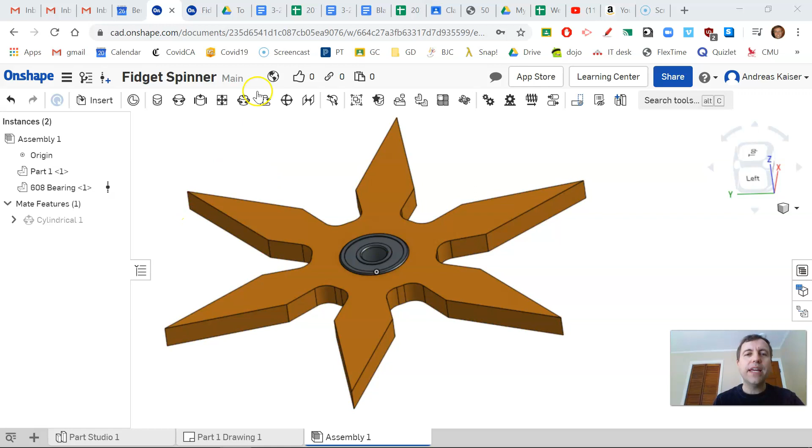This is our model. I found this online, it looked really cool. It reminded me of a ninja star, and I always wanted to be a ninja, so now I can make my own ninja fidget spinner.

I'm going to change a few of the dimensions. This 28 millimeter hole, I'm going to change to 22 millimeters to fit a 608 standard bearing that fidget spinners use. But the rest of the dimensions I'll pretty much keep.

Let's get started. I'll open up a brand new OnShape right here. The key to making any 3D model is deciding how you're going to break it down into pieces.

So going back to my design, I think I'm going to make this center circle first with the hole. Then I'm going to make one of the little spiky things that stick out, and copy it around to make the rest. I might add some other features later to make it look a little better.

Let's do this circular one. It's a 40 millimeter diameter circle with a 22 millimeter hole for the bearing to fit inside. I'm going to do a sketch.

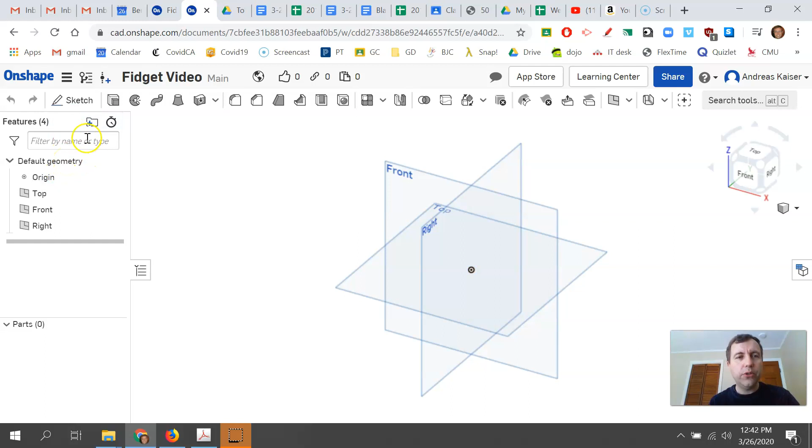Before I do a sketch, always check your units. I changed my default units using the OnShape preferences, but you should always check your workspace units. Make sure you're in millimeters, and 0.1 is good enough for accuracy.

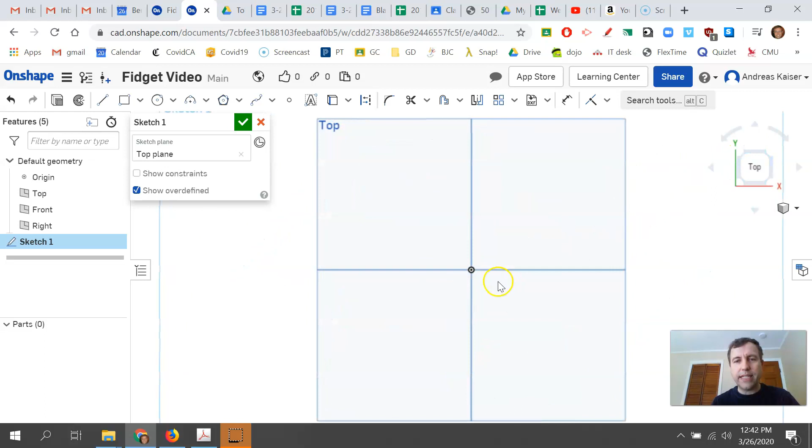I'm going to create my sketch on the top plane, click top plane so I'm looking straight down on it, and zoom in a little bit. I like to always show constraints, so I clicked on show constraints. I'm going to pick the circle tool.

In the sketch tools, make a circle that's about 40, and then make another circle that's about 22. That one wasn't centered, but don't worry, I can fix that later.

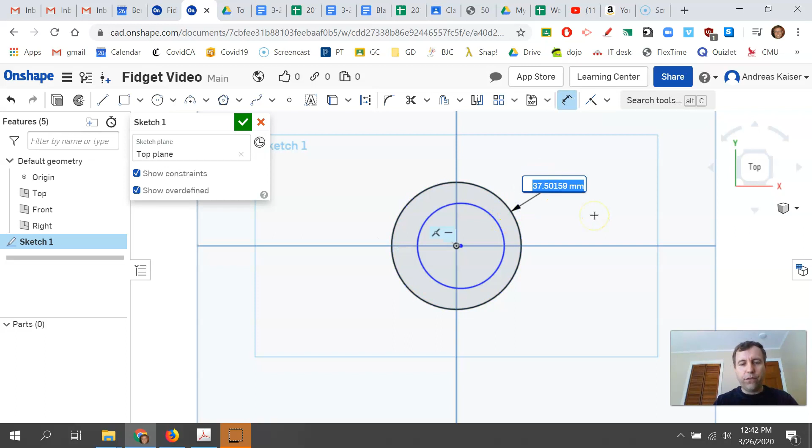Now that I got those two circles, let's dimension it. I can dimension this one to be 40 millimeters, and use the dimension tool to dimension the other one to be 22 millimeters.

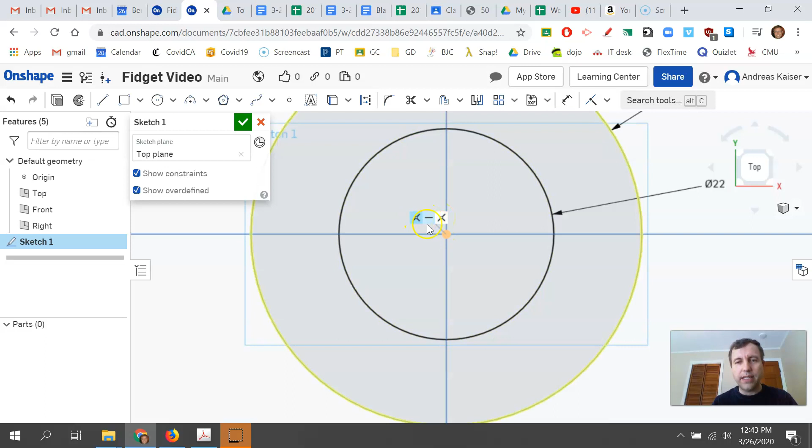This one's still blue because it didn't see that I wanted to center it. That's not a problem, hit escape, and I can move this blue one so it locks to the origin. Now this shows me it's constrained on the origin. Now they're both black, and black is beautiful. That's how we like it.

It's grayed out, that means it's a continuous contour. And we can do the extrude.

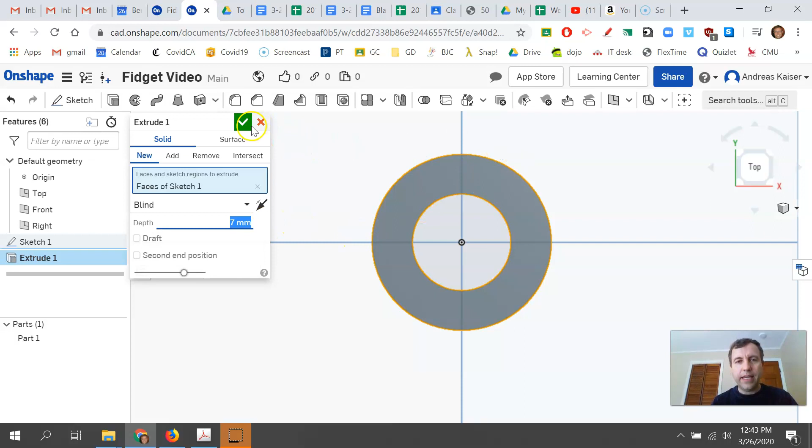Now I'm going to make my fidget spinner a depth of 7, because that's about the size of my 608 bearings that are going to be used. So I'll do 7 millimeters and check, and I can look at it in 3D, and that looks good.

Now that I got my center part, I'm going to make one of these little edges here, these little spikes. So I'm going to do another sketch.

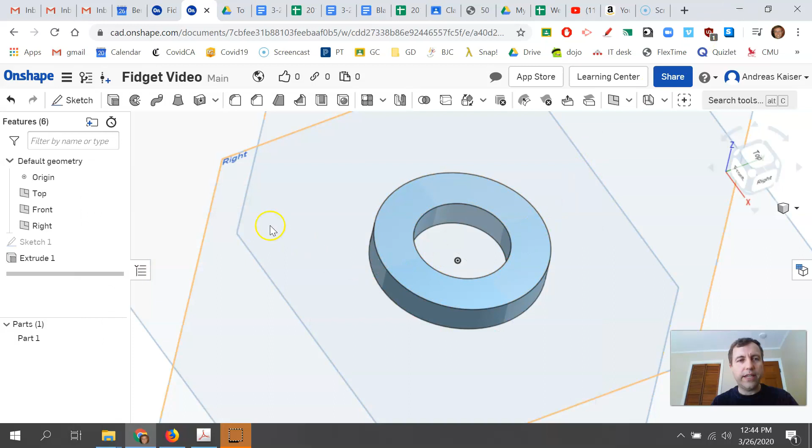Let's go and create our new sketch. I'm going to look at the top again, select the top, and create a new sketch on the top plane. I'm going to draw it right here.

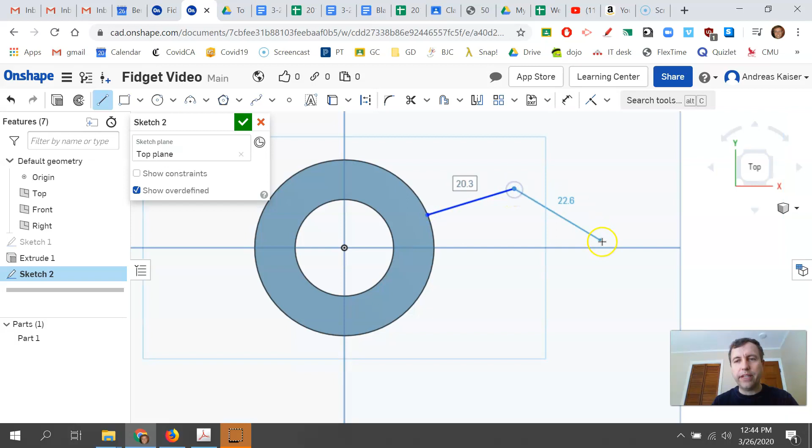What I like to do is freehand it first, just to see if I get the general shape. So I'm going to freehand one side of this spike. It goes somewhere on this circle, goes up a little bit, and then goes down to somewhere like that. Hit escape to end my line command.

And so it's going to look something like that, but obviously it's blue. It's not constrained yet. We have to tell it a few things, put some measurements in.

One of the things I noticed on the measurement is how far away this point is from the center. Looking at our measurements, we have this outside circle on our 2D drawing, which is a diameter of 146. Half of that is 73. So it looks like from this point to the center of my fidget spinner is 73. Oh, it's right here, they told it to us down here too. So 73 is that distance.

Now I can go and do my dimensions. I'm going to go from this point to the center and change it to be 73. Okay, so got the end point there.

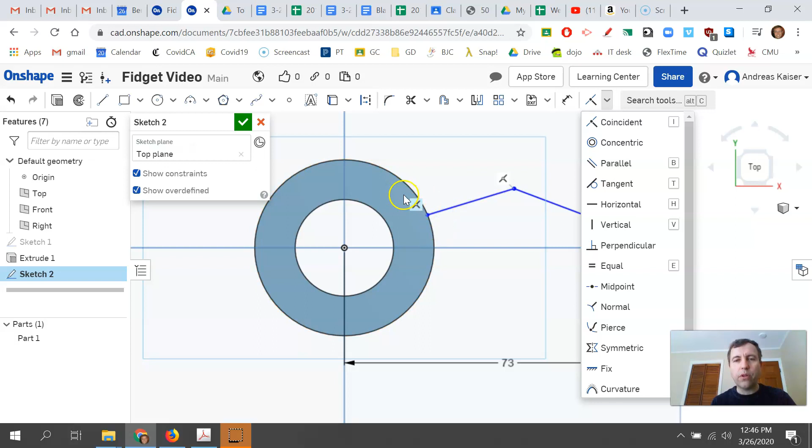Now another thing I noticed is this line is supposed to attach radially to that point. There's not a constraint for that directly. I was looking for a collinear, and I didn't see a collinear I could use. But what I did see is normal, so I can use that. Normal is kind of like perpendicular, but for a circle. So if this line is going from the radius, it must be attached to the circle at a normal, or 90-degree, angle. So I'm going to use normal and say I want this line and this circle to be normal to each other, and lock that one down.

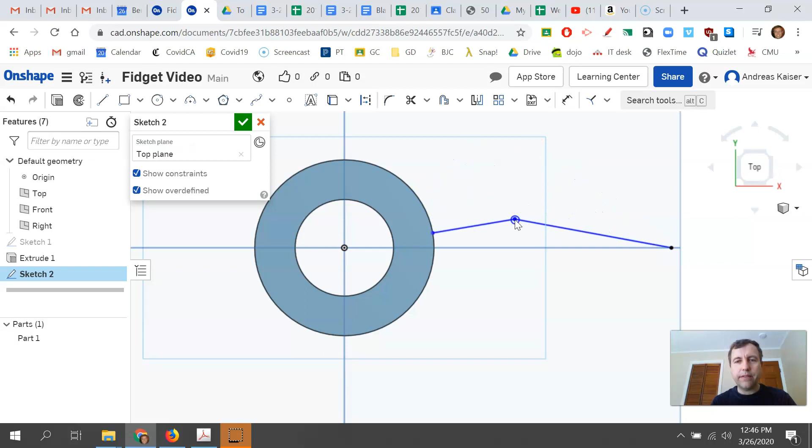Now it's still not black for a couple reasons. One, this angle - it doesn't know where this point is. How angled is this? Is it barely an angle, or is it a steeper angle? Let's see if we can find the angle.

Going here, I notice there's 15, it's a 15-degree angle from this edge to the horizontal. So we can use our dimension tool. I'll select this line first and then that line, and it lets me do an angle. I'm going to say that should be exactly 15.

Good, now it's still not black. Remember, when it's blue, it's not fully constrained. We boo for blue - boo, boo, boo for blue.

All right, so now we're going to try and see if we can get this blue to be black. I'm going to try to grab the blue, or this point, and see what the problem is. It knows this line, but it doesn't know where to transition from this angle to this angle. So let's see if the drawing shows us.

Well, it looks like the drawing says that there's this circle that goes around here that's a radius of 36. So that means from this point to the center is 36. So we can add that dimension.

Let's try to do that. We're going to go from dimension, from this point to that point, and make sure it's a radial dimension like that, not up and down like this. We have to do angled like that, and type in 36.

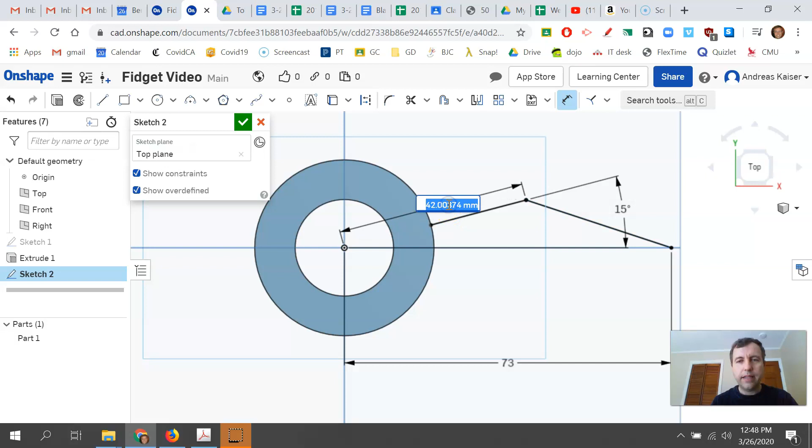And now we have it fully constrained, but it's only half of our spike, so we need to add the next half of the spike, the bottom half.

So in order to do that, I'm going to use the mirror tool up here in my sketch tools. When I select the mirror, it says first select a mirror line. I want to mirror around this line, then select entities to be mirrored - I want to mirror that line and that line. And since I mirrored it, they're fully constrained because it's using these constraints, just copy them over again.

And that looks good. Now, this is not a complete contour yet. If I try to finish this sketch and do an extrude, it's not going to let me select this spike because it's open here - we didn't close it. So Fusion automatically closes it, but OnShape does not.

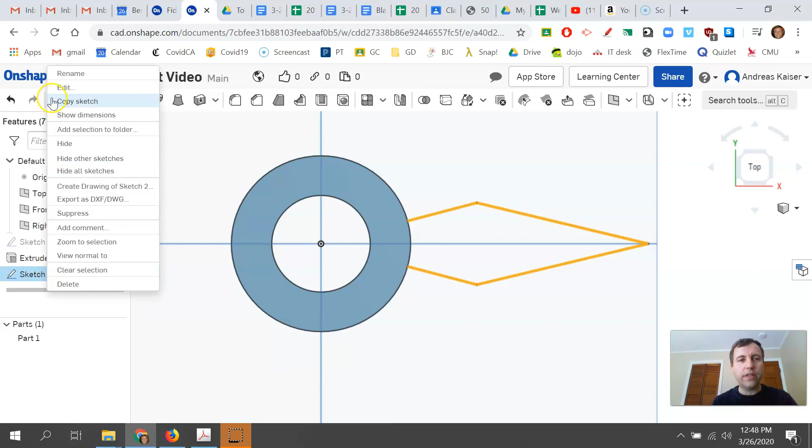So I'm going to exit this extrude and go back to my sketch. I'm going to right click over the sketch to go back into sketch mode. Now I'm editing the sketch, so I have to add this little curved line.

So I can use another feature that both OnShape and Fusion have. It is to convert entities into sketches. So this is not part of my sketch, this circle - it's from the extrusion that we did earlier.

I can select a tool up here which lets us project or convert. So we're going to project and convert this circle. Now it added this circle to my sketch. It's still black, hard to see, but it is added. But it's the whole circle, and I don't want the whole circle—I just want this little snippet right here.

So I'll use the scissor tool to trim. I don't want to trim this part, I want to keep that part. I want to trim this outside part. So I'll trim that, and now it's grayed out, telling us this is a complete enclosed shape that I can extrude.

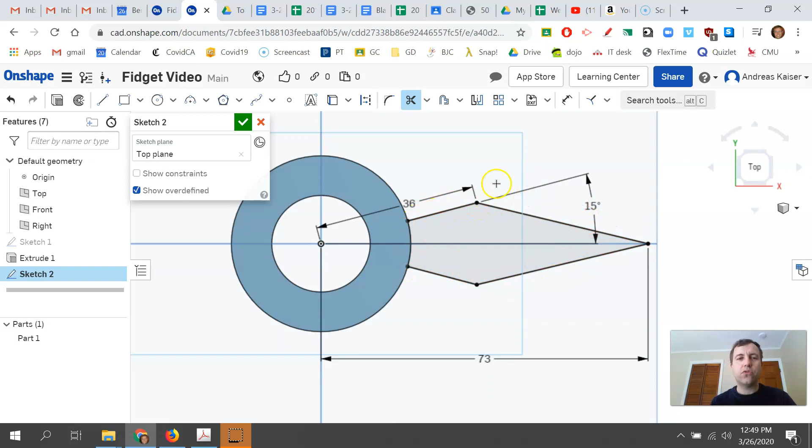So I can say I'm done with that sketch, and now I can extrude. What do I want to extrude? Which face? Well, I want to extrude sketch 2, so I'll select sketch 2, and then do it in 3D. How far do I want to extrude it? I could type in 7 again, and that would give you exactly the same height as the earlier extrusion.

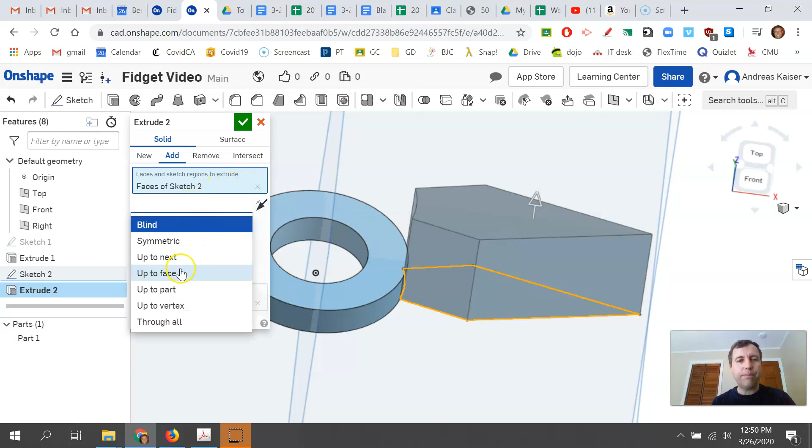But let me show you some other tricks you can do. You can go up to a face, so now I can select, hey, go up to this. That way if I change this to be more than 7 later, this will automatically change. So that's always good to do, link things like that to make it easier to change everything at once if you decide 7 is too thick or too thin later on. This looks good, I'm going to select done.

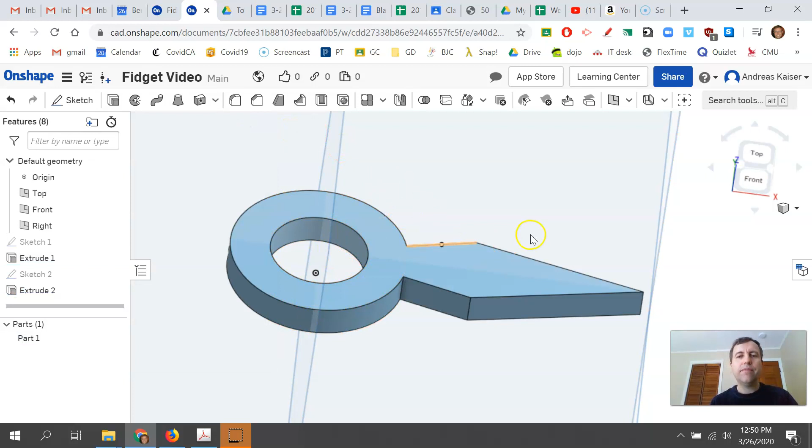So I have my first little spiky part of my fidget spinner. Now I want to add a bunch more. If I look back at the drawing, it looks like I have 1, 2, 3, 4, 5, 6 equally spaced around this circle. One way to think of it is like if you spin them around this axis that's coming straight out of the center of the fidget spinner.

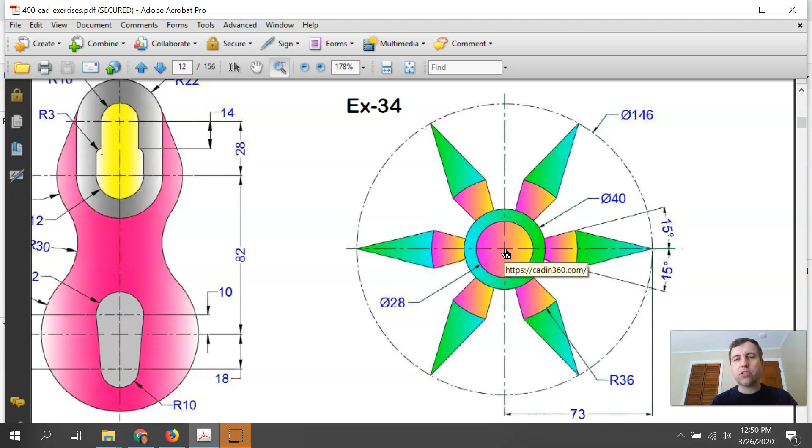So Fusion will automatically have axes where the 3 planes show up, probably somewhere in this menu. But if Fusion doesn't, or OnShape doesn't for sure, you can add your own axes. So we're going to do that next.

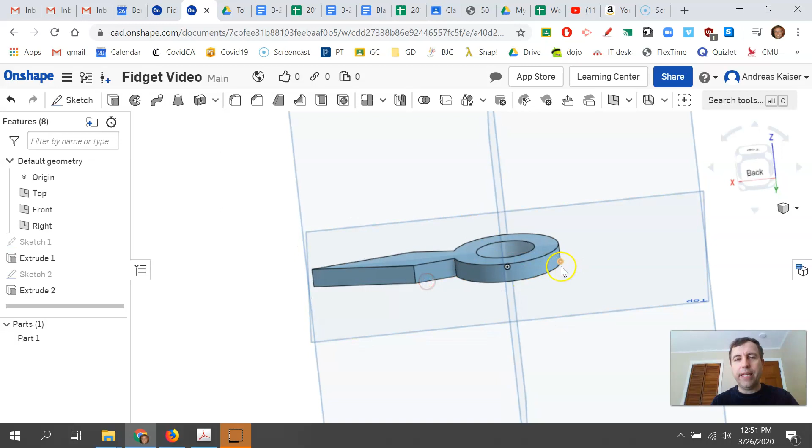So I'm going to pick maybe the front plane. I'm going to go to the front. If you right click on the front plane and go view normal to, it'll flip it around so you can see it from the front. And I'm going to create a new sketch.

For this sketch, I'm just going to draw a straight line up from that origin, straight up. I'm going to do what's called a construction line. Now that's highlighted, which means I'm drawing construction lines. I'll click a line, click here once, and then you see how it's like a dash line with big dashes and little dashes? That's called a construction line. You're not actually going to create it—it's not part of your model.

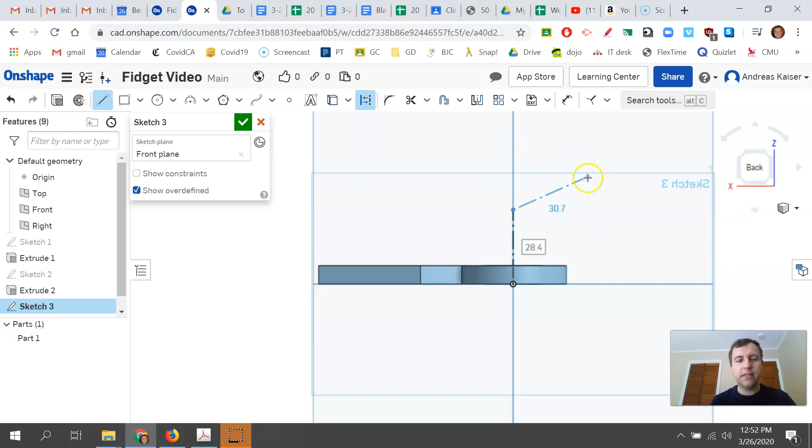It's just to help you draw what you need to draw, or help you model what you need to model. So I'm going to have it go—it doesn't really matter how far it goes up, it's not going to show up on most things. I'll hit escape, so now I have this axis, so that's good. And then I'll have this axis that's going straight up.

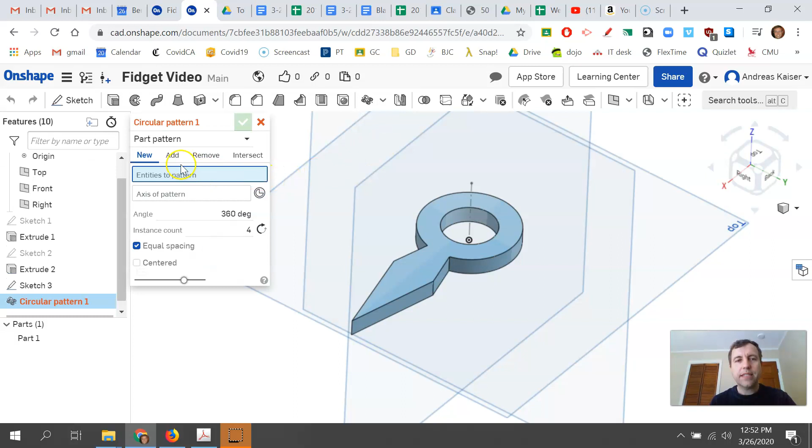And now I can do my 6 repeats. So I'm going to go to the pattern. I don't want a linear pattern, I want a circular pattern. So I'm going to do a circular pattern, and this is going to pop up. Now you have to change something—this is a part pattern, we want to change it to feature pattern because we're going to pattern some of the features.

So what do we want to pattern? We want to pattern the extrude, which is this piece that stuck out. And the axis that we want to pattern is we're going to use this axis right here. And then how many? Well, it defaults to 4 and 360, but we want more than that, so I'm going to type in 6.

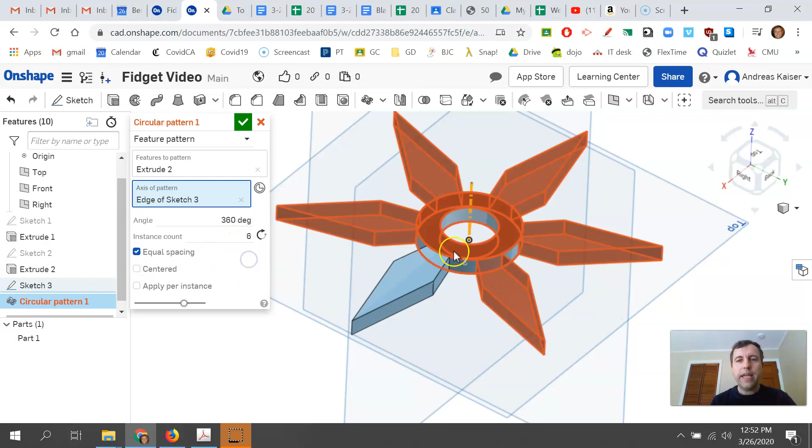And that's 6. Now the red means there's some kind of error. It says it could not regenerate. Let's look at the error. If I put my mouse over the red, it's a circular pattern cannot regenerate properly. Why not? Well, let's just try selecting the apply per instance option.

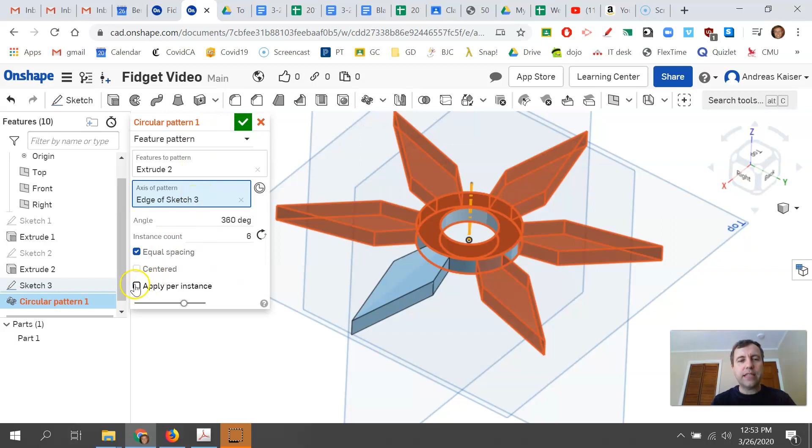Now Fusion doesn't have this, they have a bunch of other options, but we're going to try this: apply per instance, just like they told us. And look, it fixed it. It's no longer red, it looks like it's going to be able to create.

Now we could decide, you know what, I want to change my design a little bit. I want to try and do more spikes. You can do that, now you have 8. You can do 50 if you want, but you're going to have to wait for the computer to regenerate, it's going to take a while. Okay, they're 50, that doesn't look that great. Let's go back to 6 just for the purposes of this video.

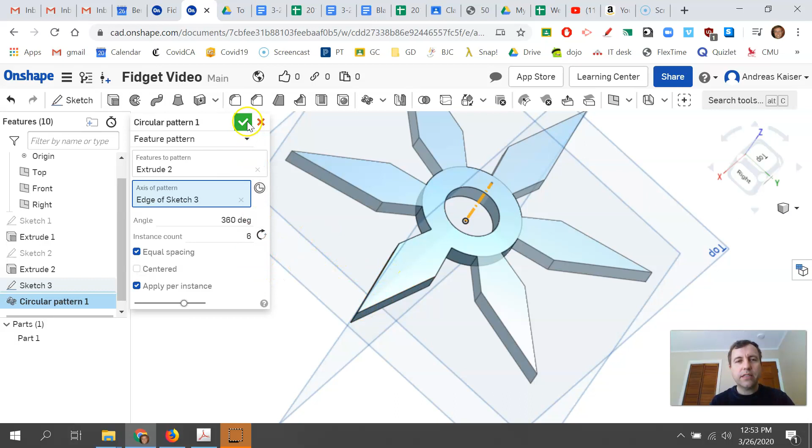And when you're done, you can say, hey, that looks good. So here's my fidget spinner, it looks great, I love it. But I noticed something: if I actually laser cut this out of wood and use this as a fidget spinner, I'm going to have some cracking problems at these sharp corners, these cracks.

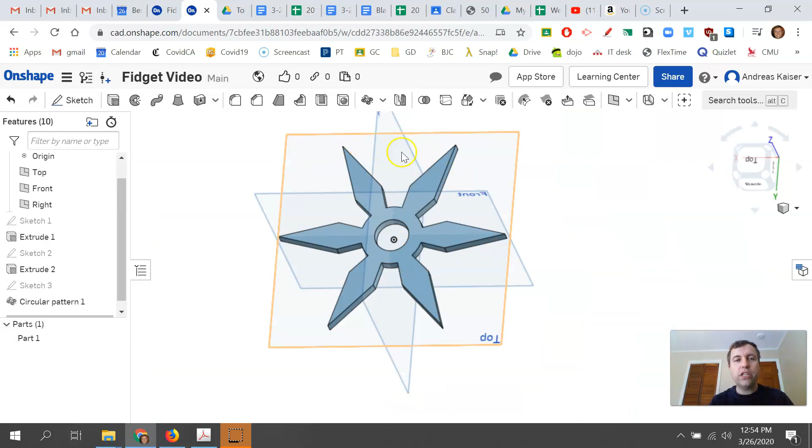So I wish I had designed these to be a little bit curvy instead of sharp edges. But never fear, Fusion and OnShape let you go back and change anything without starting over. So I'm going to do what's called a fillet on the corner, and I'm going to do it on only one of them and use my circular pattern to make the rest. The problem is I don't know which one of these was the original. Where do I make my fillets?

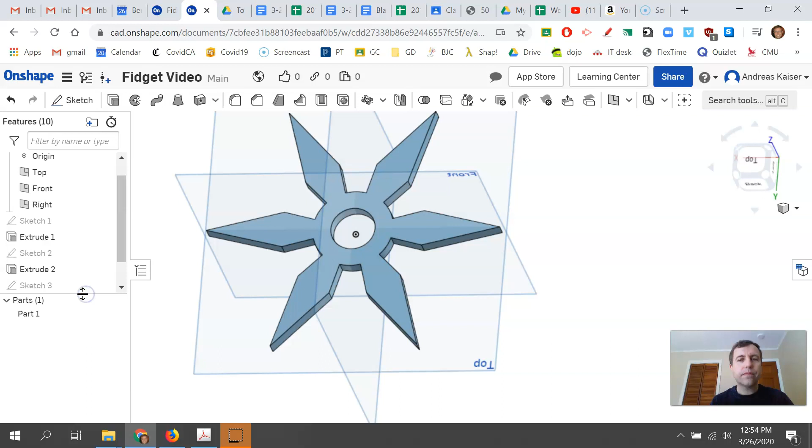I can take this bar right here, like the timeline bar, and go back in time. I'll go back before I did the circular pattern. Whoops, that's the wrong bar. This bar. And move it, my timeline, before the circular pattern. And now I'm here in the timeline when there was only one.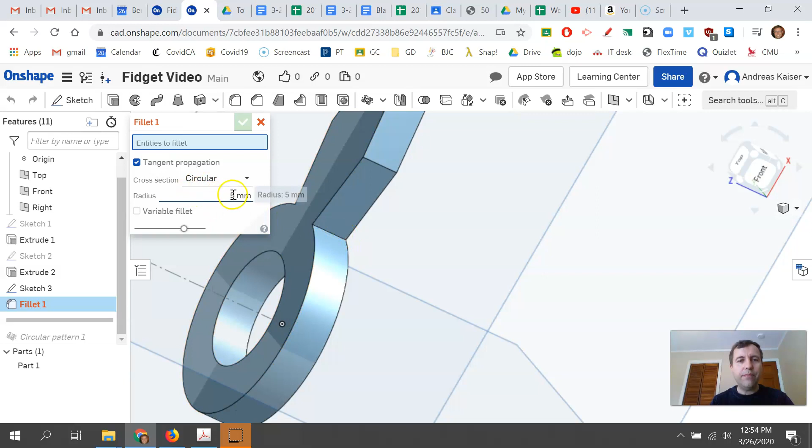And before I did my circular pattern, I want to go and add a round, so I'm going to do a fillet. Zoom in. Hey, 5 millimeters, let's see if that looks good. I'm going to click on that edge. Hey, that looks pretty good, I like 5. And now I'll click on this other edge.

So I have 5 here too. Yeah, that looks really good too, I like 5 and 5 there. I'm going to say good. Okay, so this looks great, I like that curvy edge now.

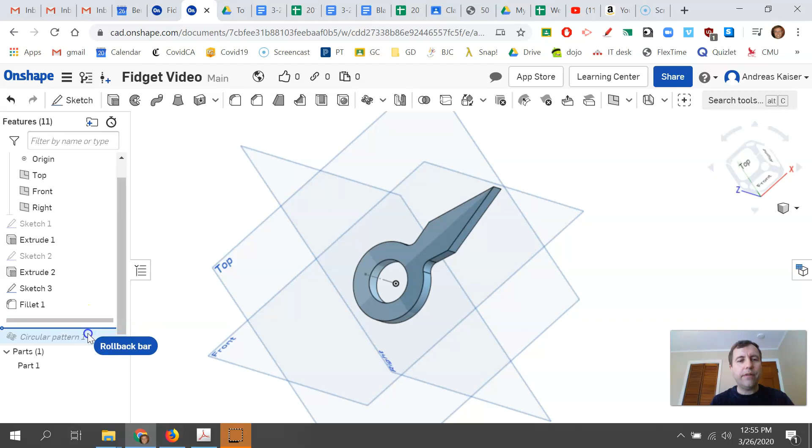Now if I go back and change my rollback bar to the end, I will see that it curved that one, but it didn't curve all of them. And the reason why is we still had the original circular pattern, which only copied one feature, which was the spike. It didn't copy the fillet feature.

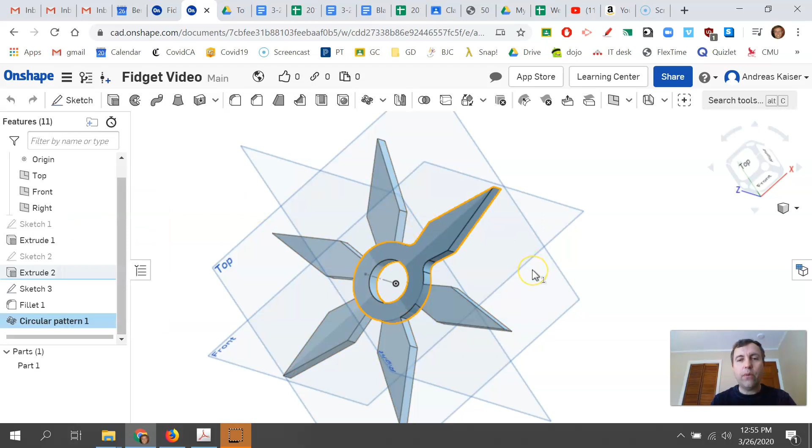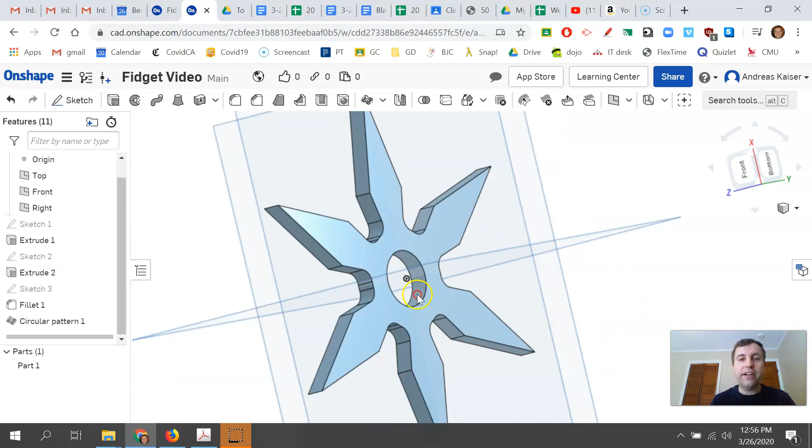Not a problem. We can right-click on circular pattern and go to edit, I want to edit that pattern. And when it says features to pattern, I can add now the fillet. So now it's copying the extrude and the fillet, and as you see, they're all filleted now. I'll check OK, and now we got our nice throwing star, ninja star, fidget spinner.

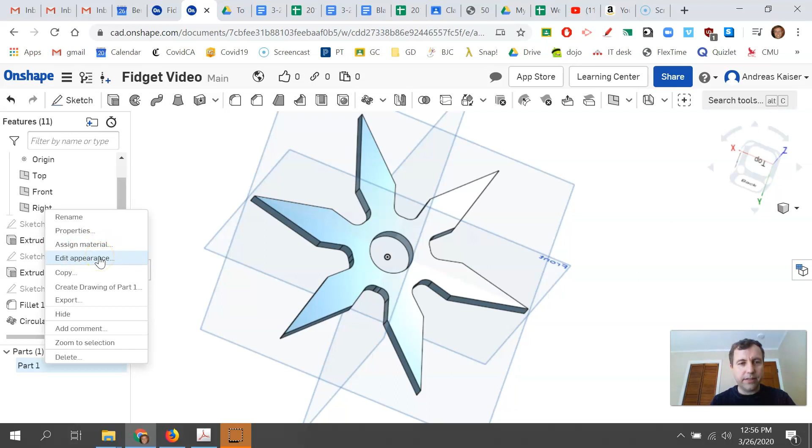And if you want to actually see if your bearing will fit, you can put in your bearing. So I'm going to show you that real quick, how to put in your bearing. And to put in your bearing, well, let's change the color real quick too. You can change the color of your part by right-clicking and saying Edit Appearance, and you can change it to a different color. Let's say I want to change it to green. I can change it to green and say, yeah, that's good. So that's my new color.

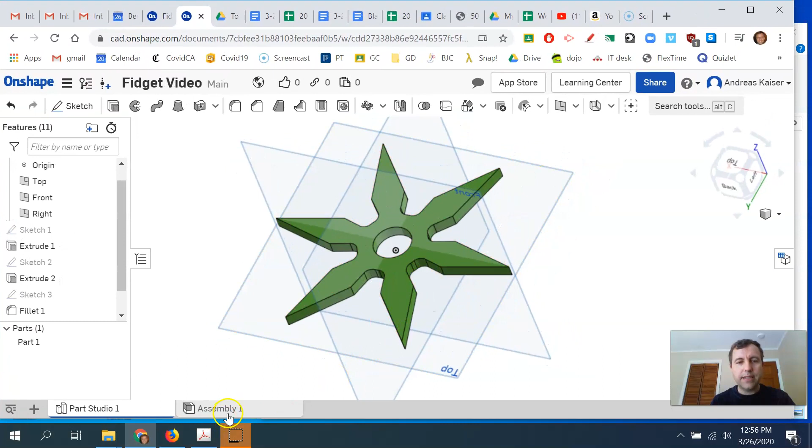And now I'm going to go down here to my bottom menu, which lets us go to, pull this up a little bit so you can see, assemblies. So I'm going to say, hey, I'm going to assemble this with the bearing. So I'm going to click on assembly. And right now there's nothing in the assembly, so I want to insert. What do I want to insert? Well, I'm going to insert my part 1, which is this fidget spinner that's green that I made. So I'm going to attach that.

And then I'm going to say, okay, that looks good, but I want to add something else. I want to add a bearing. So we don't have to draw a bearing, probably someone in Onshape's world has already drawn a bearing.

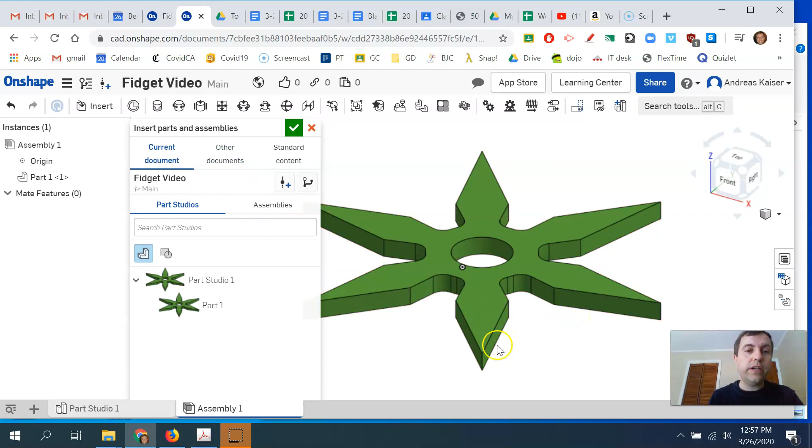Instead of just looking at your current documents, you can search all public documents, millions of them. I'll type in 608, which is the part number of a bearing, and see if anyone else has made a 608 bearing so I don't have to spend time modeling it. I'll do a quick search, and now it's searching the entire database for 608.

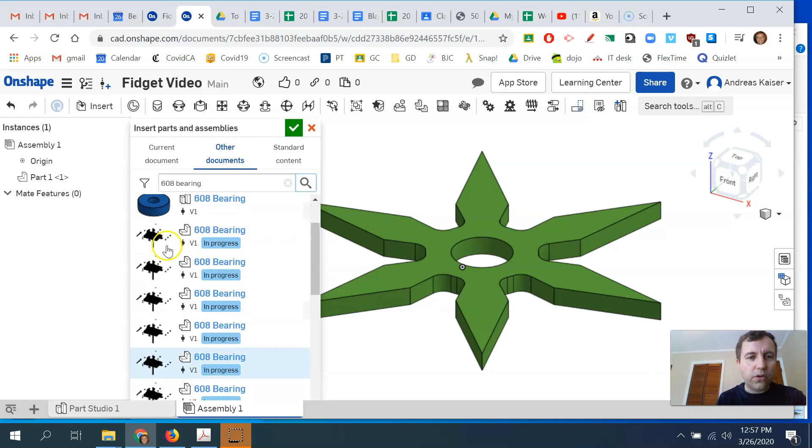A lot of people have made a 608 bearing. I like the way this one looks because it has the race and everything. There are a bunch of others you can look for, but I'm just going to grab this one, click on the 608 bearing, and place it here for now. So now I've got my bearing and my fidget spinner.

Now we need to do the mate for the assembly. There are a lot of different assembly mates in OnShape, and OnShape is actually a lot easier than most software in terms of mating, but it's still a learning process. I'm not going to go through all of them, just show you the one we're going to use - I believe there's a cylindrical mate here too. Yes, cylindrical mate, because that's a cylinder and it's going to go inside that cylinder.

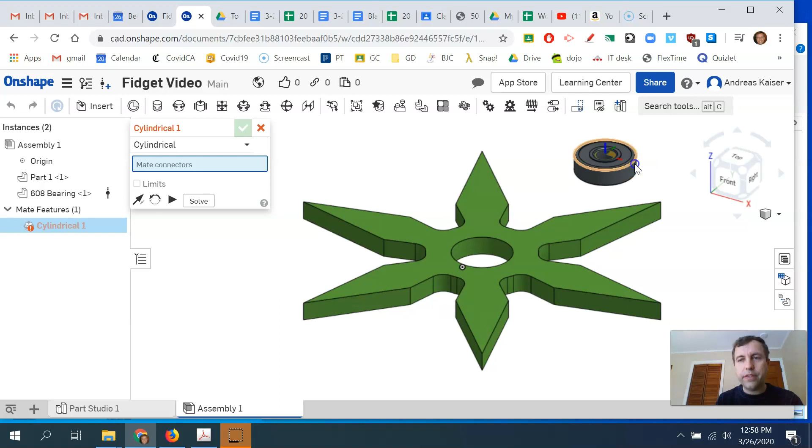I'll try the cylindrical mate, and it asks for mate connectors. So I'll say I want this to be mated with that. Boom, it fitted in and it's in - that's all we have to do. Connect the two circles and we've mated it.

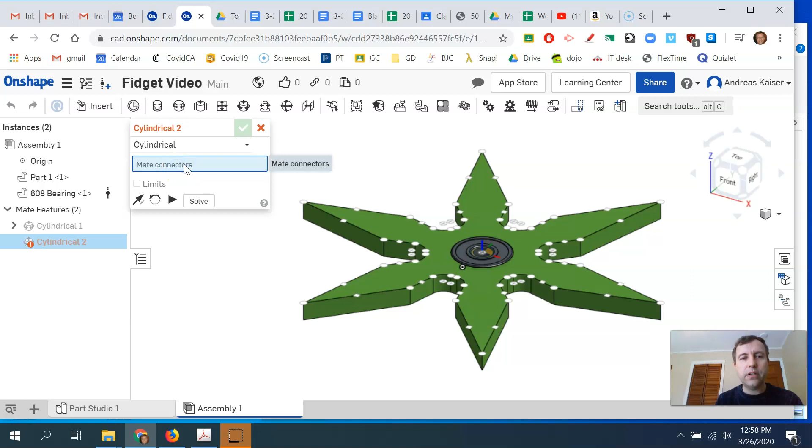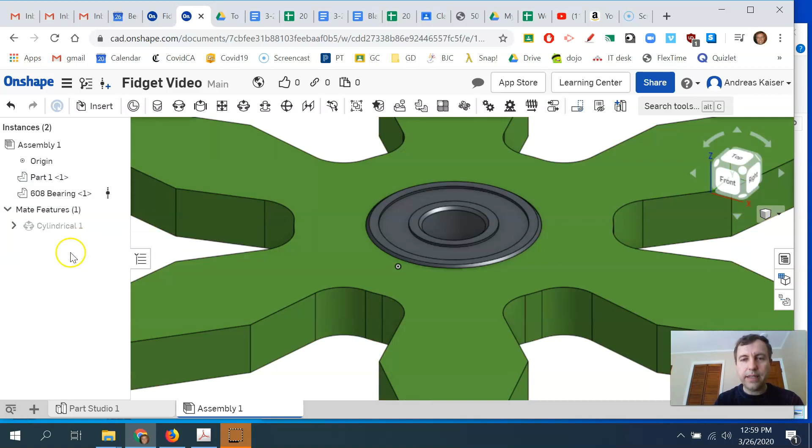It says it did not generate properly - make sure the mate has two mate connectors. So I'll try again and see if that surface can mate with that surface. Whoops, and I think I got it. I did too much, but I got the two to mate properly.

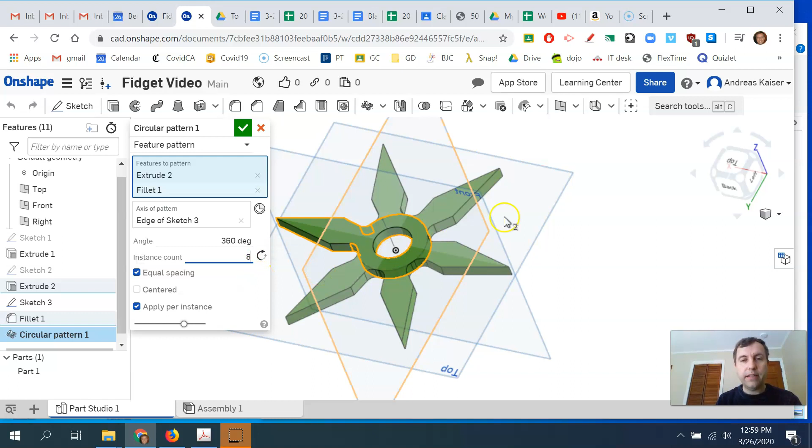If you go back to your part studio, you can even change something and the assembly will automatically update. So if I go to my circular pattern, edit it, and change it to 8 instead of 6, it changes my throwing star. If I go back to my assembly, it will automatically regenerate and also make it 8 - they're linked.

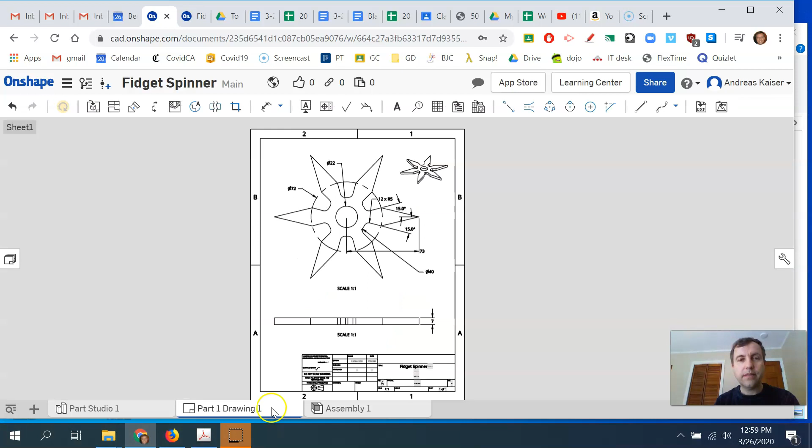If you have time, you can also work on drawings. You can make part drawings that show your front and top view with all your dimensions, an ISO view, and scale. That's pretty easy to do in OnShape as well.

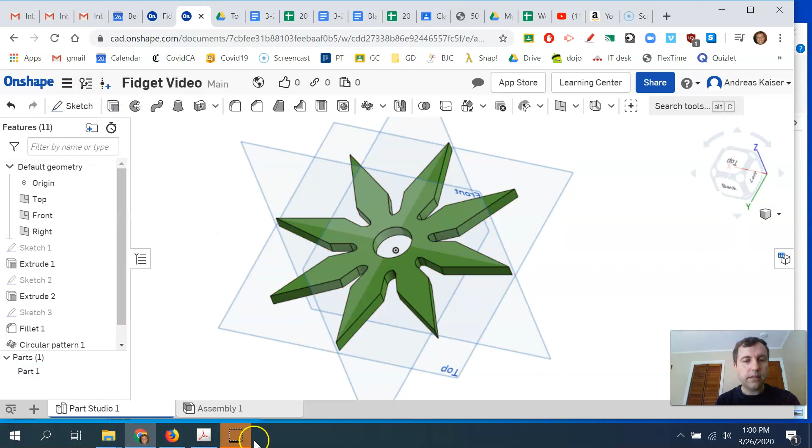When creating a drawing, I can go back to the part studio. If I wanted to create a drawing for this, go down to where it says Part on your part menu, right click on it, and say create drawing of part 1. Make sure you pick ANSI with millimeters - ANSI is our style of projection, don't pick ISO - and then you'll get the correct views. You can do no views and add your own, or start with 4 views and delete the ones you don't want. I'll just select no views and click OK, and it will create the drawing for you.

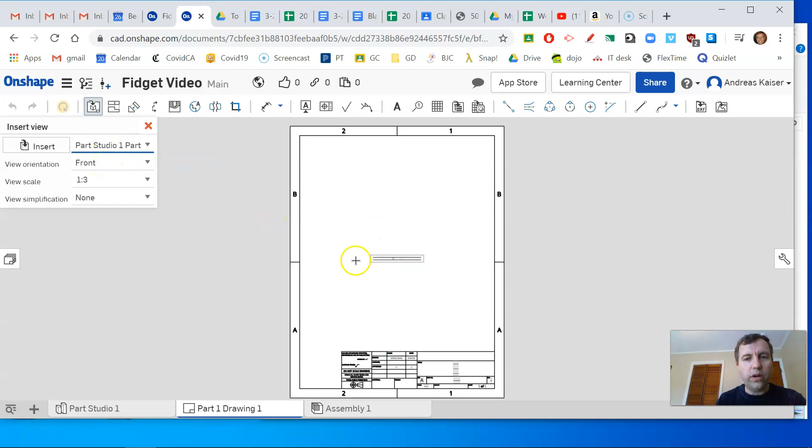It's loading up, and you can choose what view you want first. I want a front view, and I want it to be 1:1, so I'll click 1:1. I'll put my 1:1 view there, and then my top view will go here. Perfect.

If I want another view, like an ISO view, you can add an ISO view like that. If you want to change the properties of the ISO view, just hit escape to get out of the views and then go to view properties. You can also double click and say, this is isometric, I don't want it to be so big.

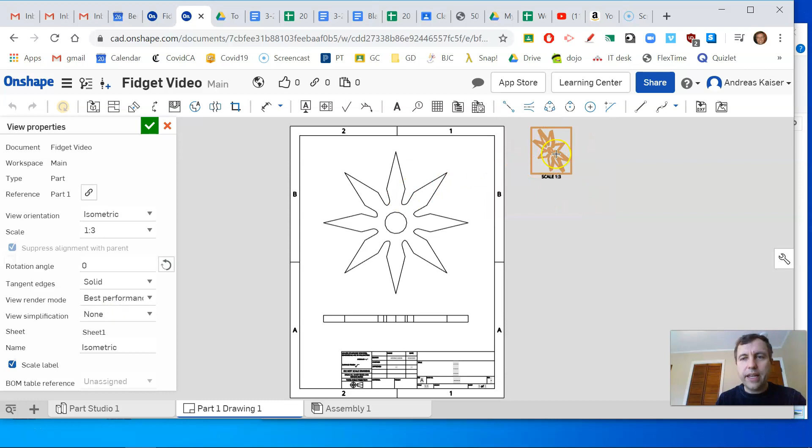I want it to be maybe 1:3, and then I can move it. That sounds good, so I'll move it into the corner so people can see what it looks like. Everything else is 1:1, and then you can use the dimensioning tools to add your dimensions and so forth.